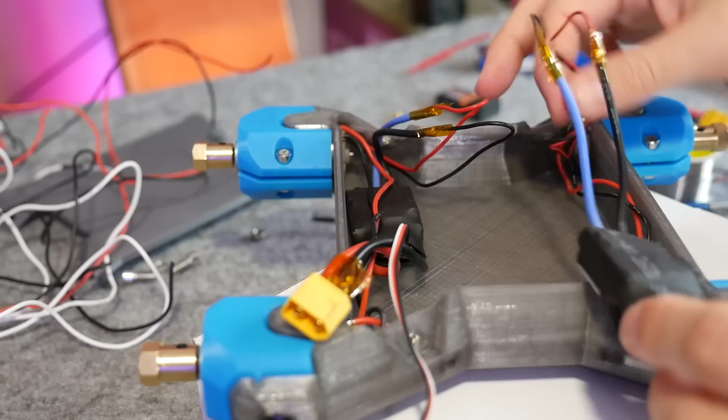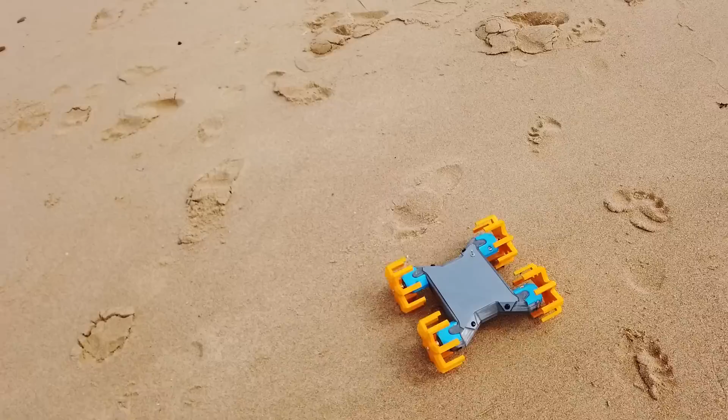This is my off-road robotics platform that I recently showed on the channel that a lot of you really liked, and in that video I promised to show you a breakdown of how you can build your own. This is actually kind of just an introductory video into robotics platforms in general, what you need to get, how they work, and how you can use them to make all manner of different interesting projects, because at the heart of it, they're all kind of the same. It's just the implementation will change depending on what you're going for.

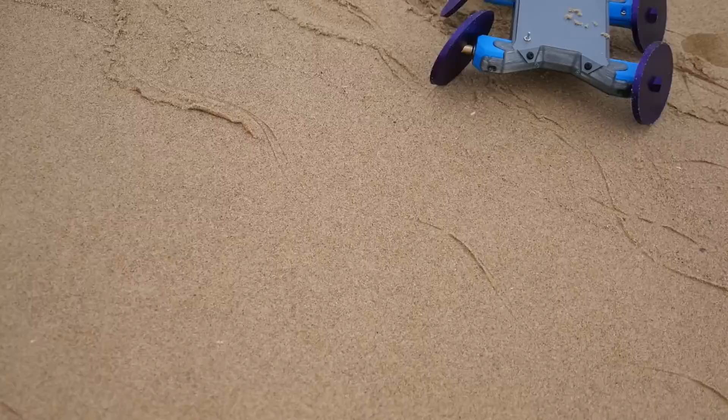And in this project, the aim was simple: get some wacky wobbly wheels and make a platform that I could use to test them out. So I wanted to make a four-wheel drive platform that I could control remotely and then drive around and see how the wheels responded on different surfaces. So we'll be starting with the electronics, and then I'll show you the design process and then the assembly process to put something like this together.

And let me just say, there's a lot involved. This is sort of an introductory video. There's a lot that you'll need to research independently from this video. It's not just click a list of purchase links and then throw it all together and magically it works. It's kind of involved, but I will say that it's very rewarding. I learned so much building combat robotics back in high school that it influenced my university, and then my 3D printing interest, which is kind of where I am today, is thanks to my interest in combat robotics. So there's a lot involved, but it's definitely worthwhile checking out.

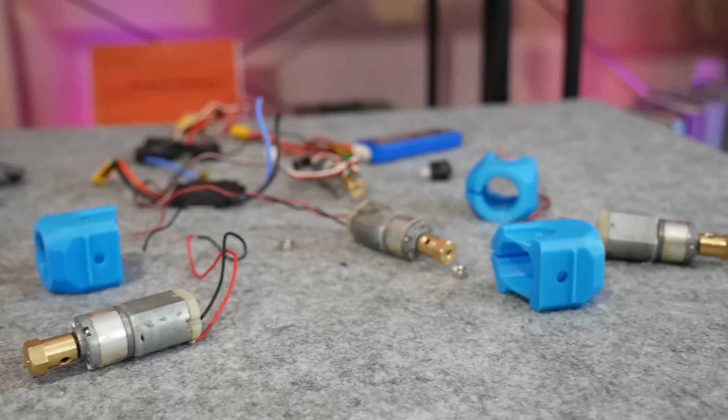So the component we'll start with is the gear motor. This is what you'll use to make your platform able to move around. Essentially it's a motor with a geared reduction to an output shaft that you attach your wheel or whatever to, so the machine can move. And if you just go on eBay and search gear motor, you'll see just how daunting this task can be. There are thousands of different motors to choose from, all different price points and features, and it can be a bit daunting to know what to look for. So let me break it down for you.

A generally good range for a robot platform I've found, at least of this size, is around 200 RPM up to maybe 800 to perhaps 1,000, which is going to be a very fast remote control platform. But 200 is probably the minimum speed I'd go for. Any lower, it's going to be very sluggish. It might have high torque due to the high reduction, but it's going to be very slow. So I'd say 200 up to maybe 800 is a good RPM range for your first robotics platform. So what I'll generally do is just search for 500 RPM gear motor on eBay, for example, and see what shows up.

And you'll find listings like this. DC 12 volt motor gear reduction, worm; there is no worm gear in this motor, but whatever. 60 to 500. So they've actually got different RPM output ranges available, which is the different gear reductions. So 60, 100, 200; 60 would be like 1 revolution a second. That's so slow. Whereas you can go all the way out to 300 to 500. So let's say you want to do 500, quite a fast platform at 12 volts.

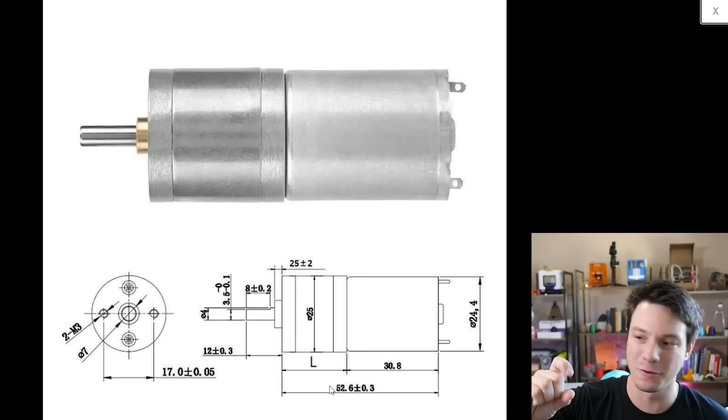And here we can see the sizing for the motor. It's got 52, which is about that in length, 24.4, which is just about an inch in diameter. And that's a decent size for a platform like this. You could probably drive something that's about 3 kilos in weight with 4 of these without too much trouble. But if you want to copy exactly what I've built, I did buy these surplus motors.

And these are 184 to 500 RPM, again, depending on voltage. But the reason I chose these is because they had a nice looking planetary gearbox. Planetary gears are a lot more durable than a spur gear reduction. It's not really going to be a problem if you're not abusing your platform, but if you want to build a combat robotics platform, then you might want to choose planetary gears instead. I will say though, with this gear motor, the motor itself seems a bit gutless. It's all a bit trial and error depending on what you go for, and that's just how much current the motor pulls in.

Some motors are quite efficient, but therefore they don't put out too much torque. But that takes us to the next section, and that's what speed controller you need to select now based on the motor choice that you've got.

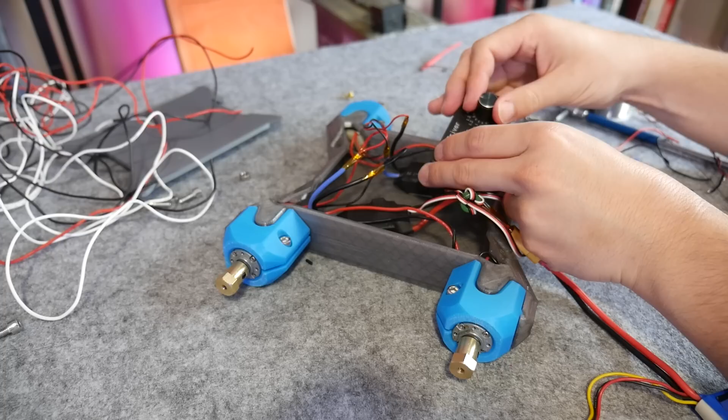Okay, so to interface with your gear motor, you need something called an ESC, or electronic speed controller, and this will control the speed by varying how much power is given to the motor based on your inputs from the battery. If you're just putting a motor straight on the terminals of the battery, it's going to be full power. This lets you vary speed and also change directions, which is very important for trying to control something precisely. For my off-road platform, I use 2 BotBitz 30 amp brushed speed controllers.

They're very much overkill for the size of this platform, but I had them on hand. They also have the 10 amp controls. But you might be wondering, what does this amperage rating even mean? Well, that's how much current the speed controller can handle before it overheats and eventually releases the magic smoke and breaks. They get hot during operation, and if you run them too hard, they will break. But if you have them spec'd above what you need, then it's like bulletproof, they'll last forever.

So I went overkill here, but how do you know what sort of current rating you should be going for anyway? If we go back to your motors, if we go down the page, sometimes the seller will have your stall current and load current. So when these motors are under load, they've got a torque rating here, and they've got a load current of 145 milliamps, which is tiny, really tiny.

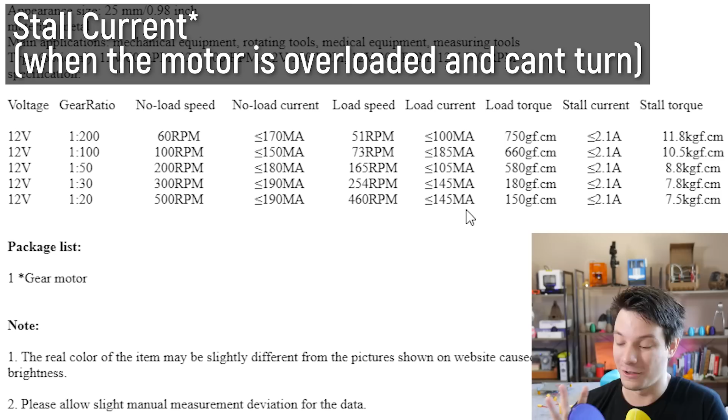But what you've got to worry about is the stall current. That is like locking the motor and then running it. And that stall current is usually what blows up the controllers. So 2.1 amps, which is very, very small still compared to the 30 amp rating of these controllers. But there are very, very weak ESCs on the market that might not even handle that. There's tons that you can choose from.

The BotBits are just single output, which you can chain to 2 motors if you like on one side. Or there's the Sabertooth, which is a dual 5 amp motor driver, so you can have it controlling both sides from just one unit. It's got 2 separate outputs for each side.

Or you can also get speed controllers that are big enough to power a go-kart sized platform like this RoboteQ, which is a dual channel 150 amp brushed DC motor controller, which can handle up to 60 volts. Obviously massive and massively expensive, but it's pretty cool. You can make something like this that's the size of a golf cart, and you still would be able to remote control it if you have the suitable hardware.

Alright, now is battery. It's determined by what gear motors you want and what speed controller you've chosen. I generally use lithium polymer batteries because they're very cheap, they're lightweight, and they're used in a lot of remote control projects anyway, so they just fit right into the ecosystem.

So a few things to note about lithium polymer, starting with the safety. They are dangerous. If they are punctured or shorted or overcharged, they can burst into flames. You want to make sure that these are stored in a non-flammable area, like a cake tin or something, in a safe space. And when you're charging them, they need to be charged on a non-flammable surface like a tile, and under observation at all times. Beyond that though, if you treat them well, they're actually very, very safe. You have to really abuse them to make them catch fire.

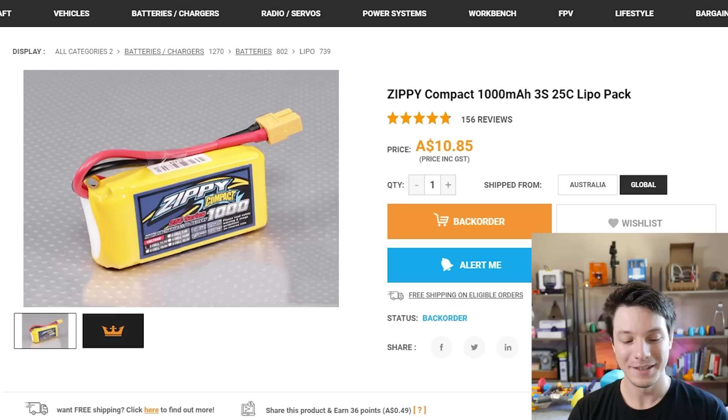So how do you choose a battery for your project? Well, you have to consider the voltage, the capacity, and how much current it can put out, what its discharge rate is. Because some motors will be very current hungry, and you need a battery that will keep up, otherwise it might explode. So for example, this battery is just a very cheap one on Hobby King. This is a Zippy Compact, 1000 milliamp hour, 3 cell, 25C LiPo.

So what do those numbers mean? Well, the 3 cell means it's got 3 separate cells, and for a lithium battery, that means it's 11.1 volts total, which is very close to the 12 volts of those gear motors, which makes it a suitable battery for that voltage range. Then you have the capacity, 1000 milliamp hour or 1 amp hour. That's how much power it can discharge over a period of time. And then you have the C rating, and that is how fast you can discharge the battery safely. And if you exceed the C rating, that's when things get a bit hairy and you can blow up packs, or they can get puffy and that sort of thing.

And they won't last very long, or they might catch fire. And you can figure out the discharge current by timesing the C rating, which is 25C, times the amp hour rating, which here is 1000 milliamp, which is 1 amp hour. And that means you can discharge this battery at 25 amps continuously till it needs to be recharged, which is way higher than this little platform will ever do.

Because remember, those motors were like 2.1 amps stalled, so they have to be all stalled, and still it would be like under 9 amps. So very safely, this battery can handle the current of this platform. And in terms of your capacity, you want to determine how long the platform will run for. 1000 milliamp hour is quite small, but for something this small with very low current draw, it still lasts for a very long time, at least 20 minutes.

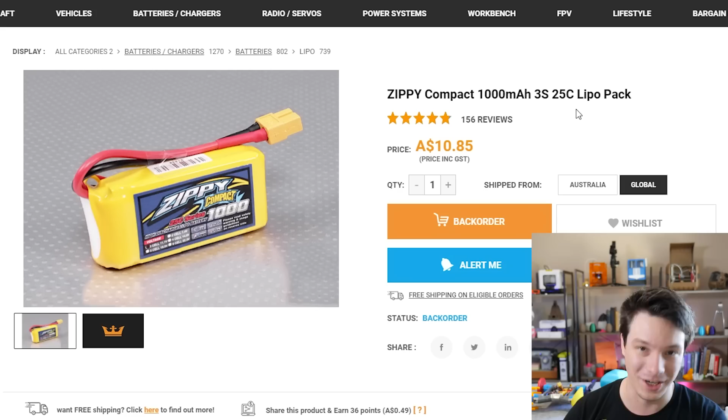And if you want to double the capacity, you get double the runtime, etc. And you can get humongous lithium polymer batteries if you want to run something all day, if you like. It's absolutely possible. And obviously, the larger capacity you get with the same C rating, the higher current discharge you can pull out of it because of how that equation works.

Lithium polymer batteries also can't be discharged to completely flat because that will destroy them and they won't recharge properly. So I don't recommend driving these until your robot can't move anymore. If you see it start getting a little bit sluggish, then I would change packs and recharge. Some speed controllers will have a low voltage cutoff to protect your battery. I generally don't bother with that, but you can definitely get that if that's your kind of thing.

And then you'll need to recharge the lithium polymer batteries, and you don't need to spend a lot of money doing it if you're using a small pack like this, up to 4 cells. You can use something like this, which I highly recommend. It's just a slow charger that uses the balance leads because, remember, this is 3 cell, it keeps each cell balanced, which again is important for longevity.

This is a really cheap charger that just uses a 12 volt DC jack. Your 3D printer probably has one already. And I just plug the battery in, let it sit there, and then it will charge slowly, and then it beeps at me when it's done. You can get very expensive, much more advanced lithium polymer battery chargers, which can charge much faster, or if you have a much larger pack, probably more important, but for this sort of little thing, one of these little chargers is absolutely more than adequate.

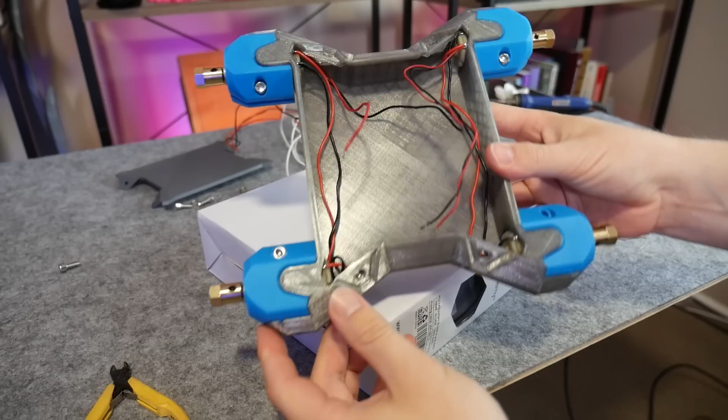Okay, so we have our platform with its gear motors, we've got the speed controller, and we've got the battery. Now we need to tell the whole thing what to do. And this is where the remote control side comes in. So again, this platform is remote controlled. I'm not talking about building autonomous robots in this video, but you absolutely could get some sort of autonomous system and slap it in at this stage. But this platform is remote controlled, so I'm going to talk about remote controls you should check out.

So there are so many different remote control systems out there. What I do recommend is a transmitter like this, which is a multi-protocol transmitter. So that means it can communicate with receivers that are from different brands quite easily by just changing the protocol. You're not locked into a certain brand and protocol of transmitter and receiver. And these are pretty cheap.

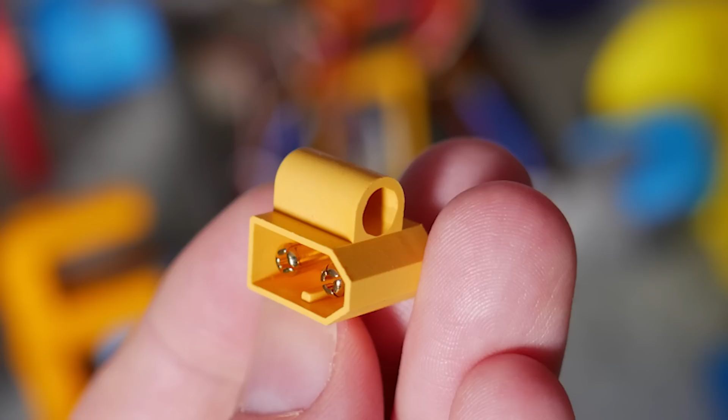There's also a lot of misc stuff that goes into these platforms. One of them you'll need to get is the plugs. These are XT60s. If you have an Ender 3, you'll probably be quite familiar with them. And there's heaps of different variations now. You can get XT30s for smaller platforms. They'd probably be totally fine for something like this. Or XT90s, which are much larger for much bigger high current applications. And there's also different mounting options. For example, you've got a mounting hole on this one. So if you want to mount it to the frame, you could, so it would lock in place.

Then you probably need lots of wire. I recommend this sort of wet noodle stuff. It's quite nice, it's flexible. Not as durable to abrasion, I suppose, but much easier to route in a system. Then you'll also need some sort of switch. Just choose a switch that can handle the current of your system at the voltage that you've used. It's all fairly basic. You'll be able to get it as you go along, and you can adjust it and adapt it for whatever platform you're building.

This is something called a removable link. You don't really need it for something like this, but if you're doing a dangerous platform, I recommend it. This is like a secondary switch where if something goes out of control, you have it accessible and you just yank it and it breaks the circuit. So it's like a switch, but it's an emergency switch you can pull out to just stop all power, which I do recommend for platforms that are large enough to cause any sort of damage.

If this little thing drives into me, it hurts a little bit, but it's not a big deal. If you have something that weighs 20 kilos and it chugs into your leg, you might break an ankle. So you might want something like this to stop an out of control system if something does go awry.

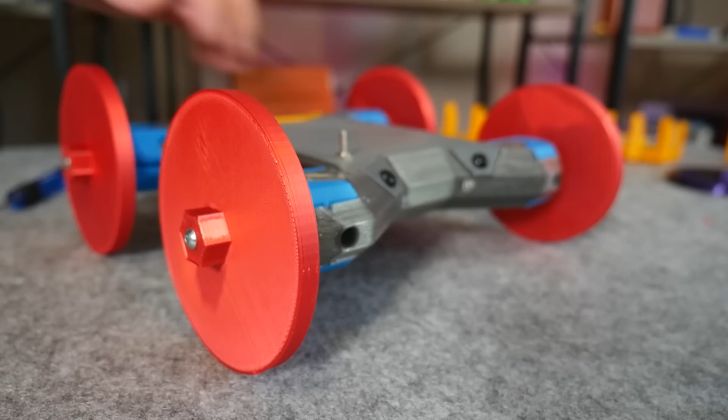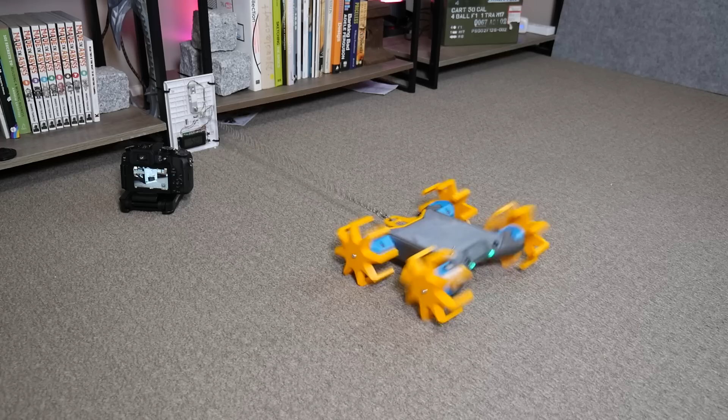I do also recommend having some kind of light to show that the platform is on and live. I just used some LEDs on the front of this one, and they've got a resistor soldered in, and they go straight into the battery through the switch as well. So again, it's only 11.1 volts. You can drop that down quite safely with a resistor, just to show the whole platform's on. I often will do that to make sure that you can see everything's on and live, and you know when it's safe and when you've got to be careful with it.

Alrighty, so I'm going to take this opportunity to go through my CAD design for the wobbly wheel robot platform.

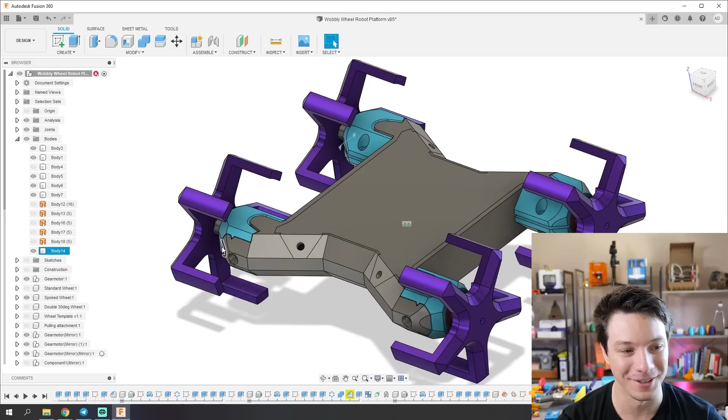That you can find the links also in the description below to print out yourself and use it for whatever purpose you like. You can use it for just a remote control platform. You can add your own autonomous system to piggyback the speed controllers and control it autonomously. You can add sensors, cameras, whatever you like.

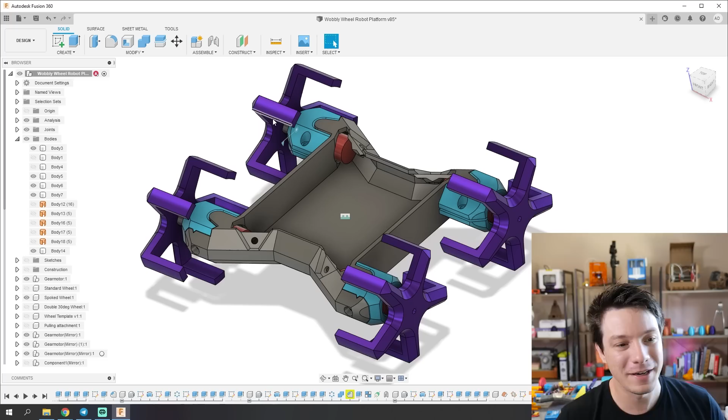I'm just going to go through the design process quickly to show you what my sort of thought process was. So what I did is I designed it with the motor pods that snap into place. And I did that because the gear motors that you find and select will probably be different to what I used, because I use surplus units as I showed you, and it's very difficult to find motors sometimes. So they actually snap into the frame here and use these little locking points to snap in.

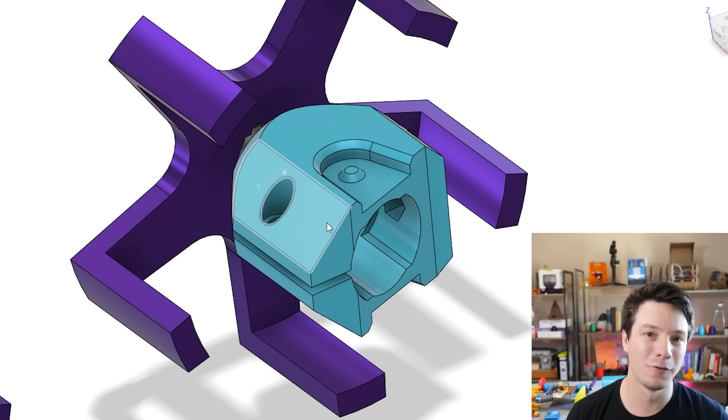And in those files I've included a blank version of this motor mount, so there's no cutout in the middle for the actual motor. So whatever you choose, for example, if it's like 24 millimeters in diameter, you can punch a 24 millimeter hole through this motor mount and it will suit your motor.

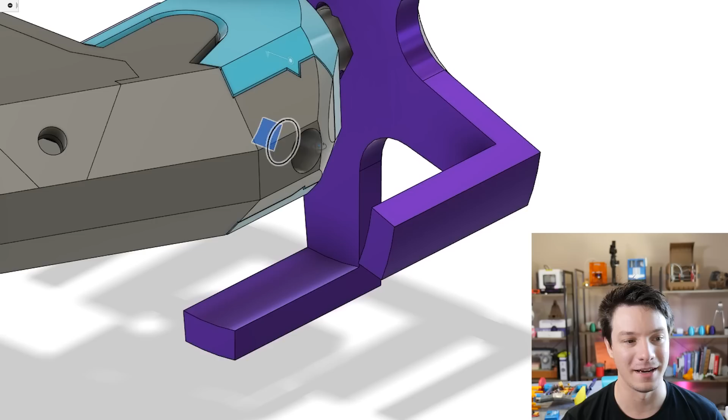This design also has a lot of allocation for reinforcing. So if the snapping points aren't durable enough for your application, you can also put a nut in, just an M5 nut. And then what you can do is just run an M5 bolt into that nut, just a little stubby one, and it will give it a little bit more purchase and reinforcing. And depending on your clearances, the motor mounts are quite tight anyway, but you can also put a nut and bolt through to clamp them down just a bit so the motors don't move at all during operation.

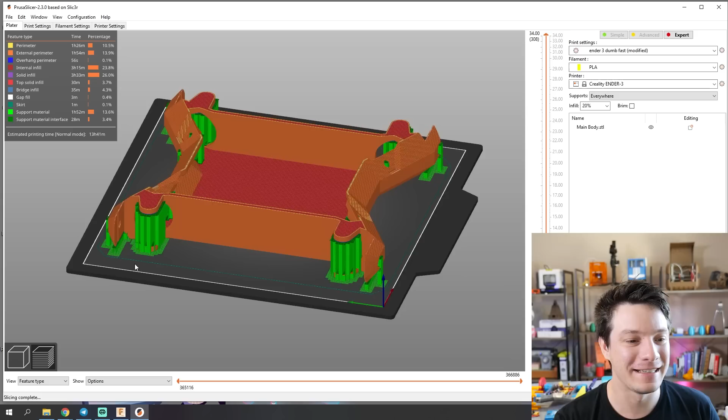All of the parts print really easily except the main body, and I do apologize, it's got a lot of complicated detail to it that just had to be there for the thing to work, which means it does need support material. And this is how I generally do it. This is like 15 degrees overhang. Yeah, so 15 degrees overhang support material automatically generated.

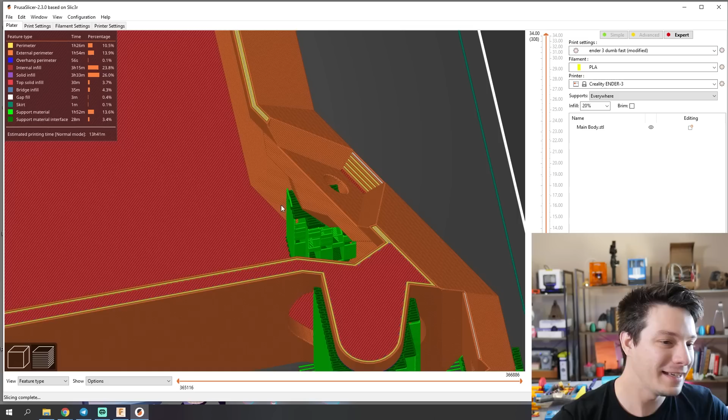You could manipulate this. So for example, it's not necessarily needed in the holes that are horizontal, but it is needed for the overhangs for the motor mount that clamps into place, and it is needed for how the top cover bolts into place. There's a little underside recess for a nut, and the nut goes in there, and then it presses in, and the top cover is secured with an M5 screw. These details aren't necessarily required if you aren't designing something that has to bolt together and be securely contained.

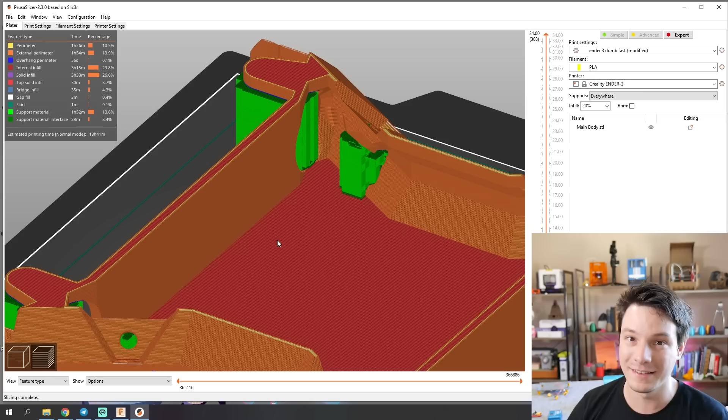So I've also included the original Fusion 360 model and the STEP file if you want to change these details, such as just remove them or add a column so there's no support material necessary. But I just like it because it gives you a lot of internal space. So as you can see, wires take up a huge amount of space in these platforms when you're attaching everything, joining it all together. It gives you a lot of wiggle room by having it overhang like that. But if you want to modify it, you totally can, and the files allow you to do that.

Alright, so all your parts have arrived, you're excited, you've made your frame, you're ready to put it all together. Now you have to wire it up. This is, and I'm going to give you a warning here, the most tedious, difficult part of the whole process. If you get it wrong, you can blow everything up. If you get it right, it's really, really exhilarating. And there's going to be probably a little bit of troubleshooting along the way, but just take your time with it and you'll not have any issues.

So how do you wire up a platform like this? Well, it looks like a nest of spaghetti, but it's actually quite simple in theory. The battery goes into your speed controllers, then your speed controllers output to your motors, and your receiver connects to your speed controllers, and your receiver will tell them what to do. You also have a switch, hopefully, in line to turn things on and off, and then a light so you know when the whole platform's on and off. That's it. But in practice, to make it all join together is a little bit more challenging.

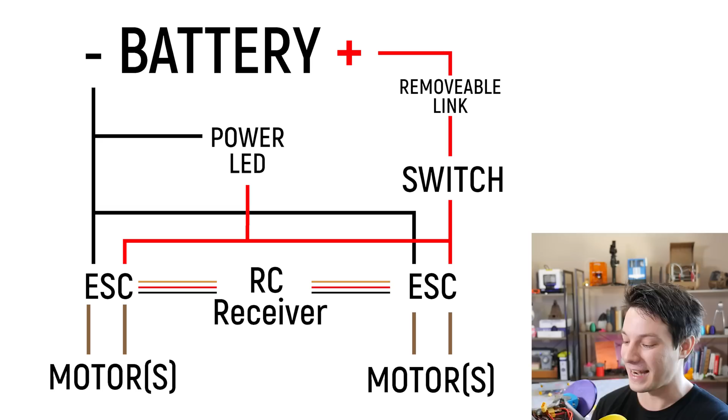So here's a wiring diagram I threw together on how this platform works. The most difficult part I find is splitting the battery, because each controller, at least in this case, I've got the two Botbits 30 amp controllers, has its own power in. So you need to get the battery and then split it into two. And it generally looks like something like this. So it's not very neat, but the battery goes in here, and then it splits the wires into two, and then one speed controller, the other speed controller, like that.

I have a switch which interrupts the positive side in this case, going back to the battery. It doesn't matter if it's on positive or negative, as long as it interrupts that flow, so you can turn the whole system off or on safely.

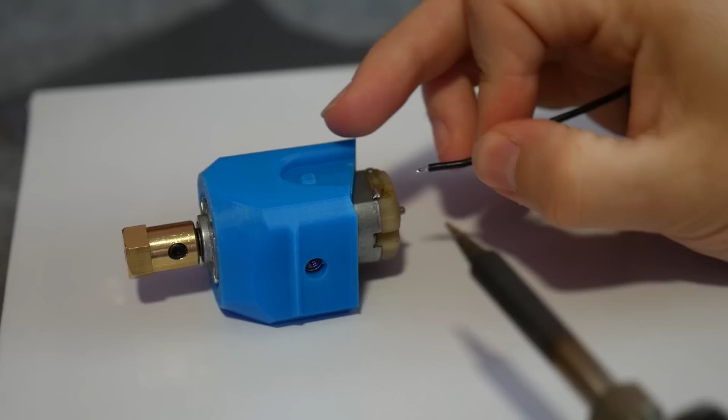You will need to do some soldering to put this whole thing together. Even if you buy parts with plugs attached, you'll still need to attach the switch and that. Soldering is a critical maker skill, so if you haven't done it already, you need to check it out.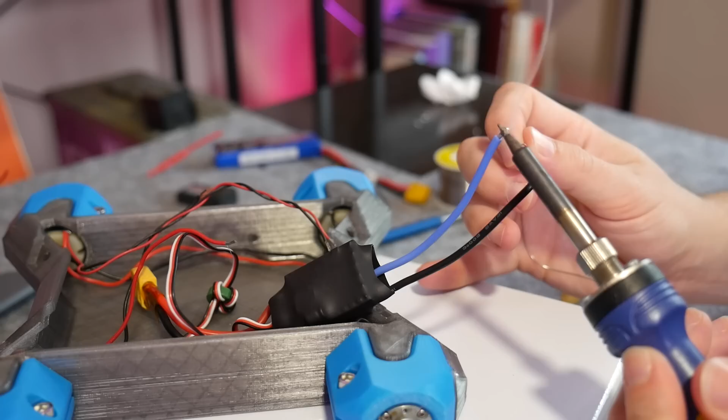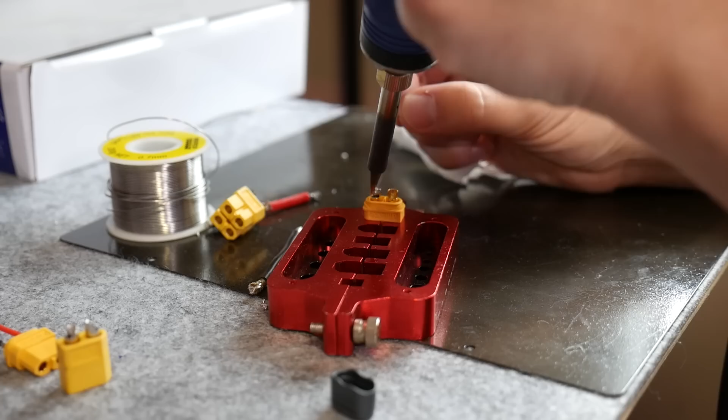For something like this, I recommend a 40 watt or higher soldering iron. Anything lower, you can't get the heat into these components, because they're designed for high current draw generally, which means they have a lot of metal to heat up, and it dissipates the heat very quickly. So you need a higher power soldering iron instead of sitting there with a low power one that won't get to temperature, won't melt the solder, and actually will do more damage overall than something that's hotter, quicker.

Throughout this whole process, you need to be really careful of polarity. That is your positive and negative terminal on your battery. The red is positive and the black is negative. You need to make sure this is plugged correctly into your speed controller - positive goes to positive and negative goes to negative. Otherwise, you will blow up your speed controller.

This only applies to the input. The output of the speed controller that goes to the motors, you don't have to worry about polarity. It just determines which direction the motor will spin, depending on which direction you push the stick. So if the motor is turning the direction you don't want - for example, if you push the stick forwards and the robot side goes backwards - just reverse the output wires on that side of the speed controller.

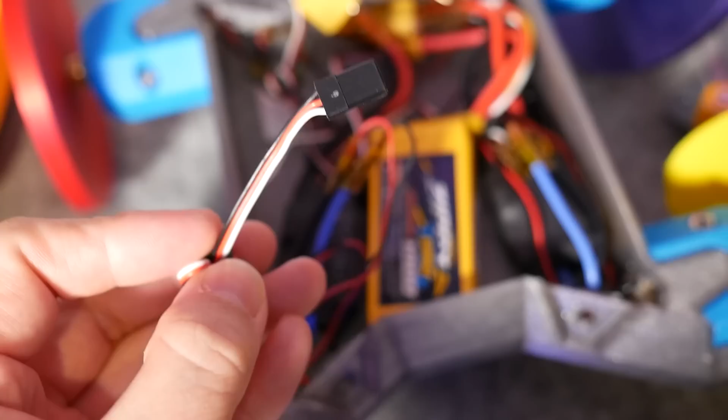But I can't say it enough, get your polarity right from the battery into the speed controllers, otherwise things will go boom. Your speed controllers plug into the receiver using a 3-pin plug.

It has ground, positive, and then a data pin, which is either going to be white or maybe orange. Just consult the manual for which alignment that is. Sometimes ground's facing outwards, sometimes it's facing inwards. They're all different, just consult that.

Then you need to figure out what channel on the transmitter affects what on the receiver, and sometimes it's not very intuitive. Consult the manual, but often I'll just do trial and error here. I'll plug the plug in to maybe 1 and 2, turn the system on when it's off the ground and the motors can't touch anything, and see what channel on the transmitter moves what, then trial and error until I get the plugs in the right spot.

Once you're happy with that, make sure there's no exposed contacts, make sure there's nothing that will jam into the battery when you put the top cover down, make sure it's all safe, the battery's charged, your transmitter's charged, and then go have fun, because you have earned it.

It is a huge undertaking to build something like this, so well done. If you get something like this moving, it's a huge accomplishment. It's not something that many people can do, so you deserve massive praise.

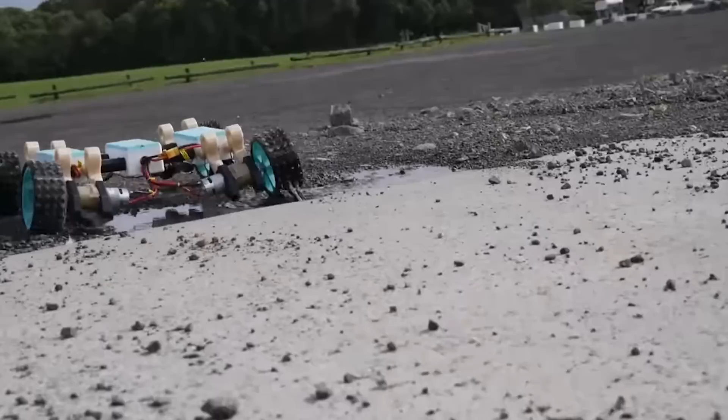So I hope this video has given you a good primer into building remote-controlled platforms. It's a lot to take in. Yes, you're going to spend a lot of time doing additional researching, but I find it so rewarding, because once you have these parts - yeah, they are a fairly large investment, not as much as they used to be, but it is a fairly high cost endeavor to get started.

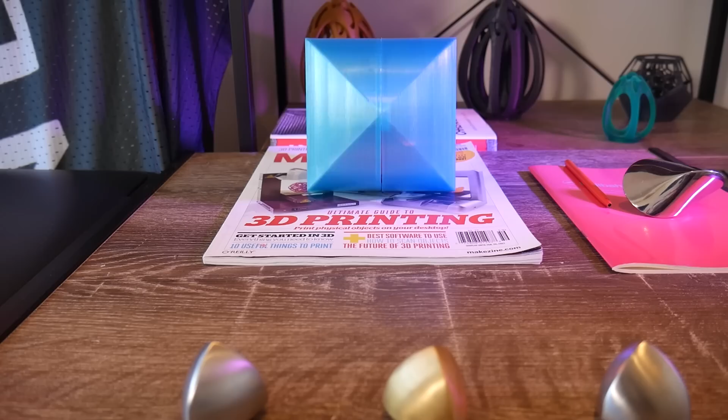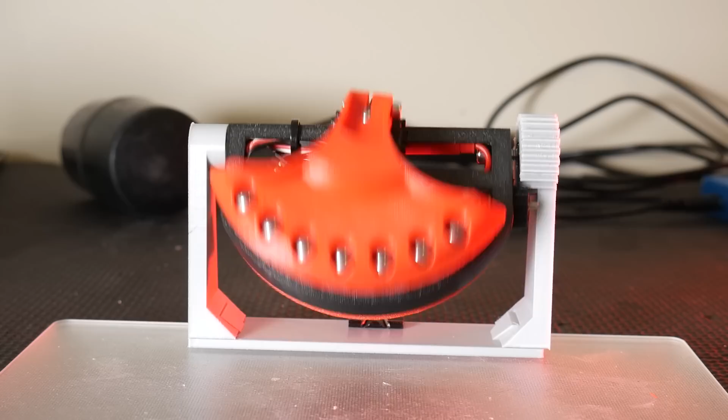You can use them again and again in different things. For example, this - a remote controlled bi-cylinder that has inside it this little mechanism I made that has counterweights that swing around. The whole thing can move around in a weird way. I did a video on it ages ago.

You can check it out here. This uses the same stuff - little remote controlled gear motors with the electronic speed controllers and a tiny lithium polymer battery. It's exactly the same concept, just a different implementation.